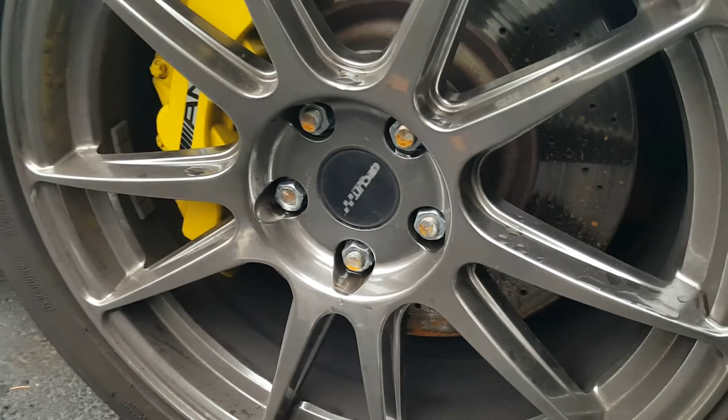Alright, so part 5 of the video series, and I've made a few changes to the car since the previous part. I've added spacers to the front because the tires were touching the suspension on the last track day. I've also had to do a stud conversion because of that.

I've also made some changes to the pushrod suspension. Last time the suspension was a little too stiff and it had already taken the car's balance from understeer to oversteer, so I needed to soften the rears to make the balance perfectly neutral.

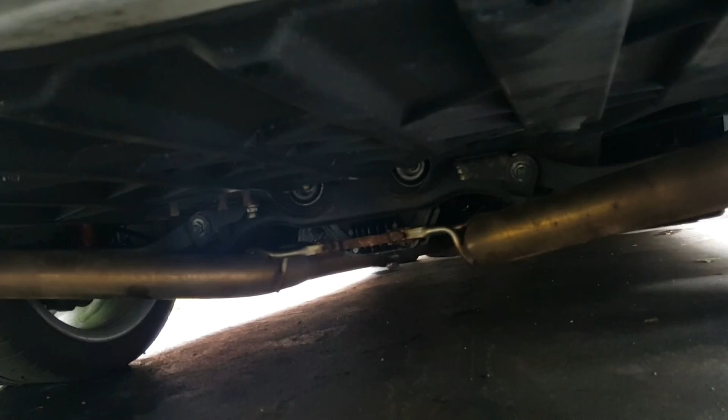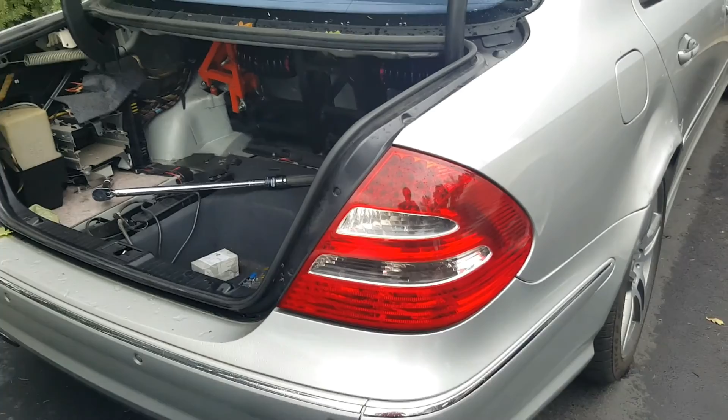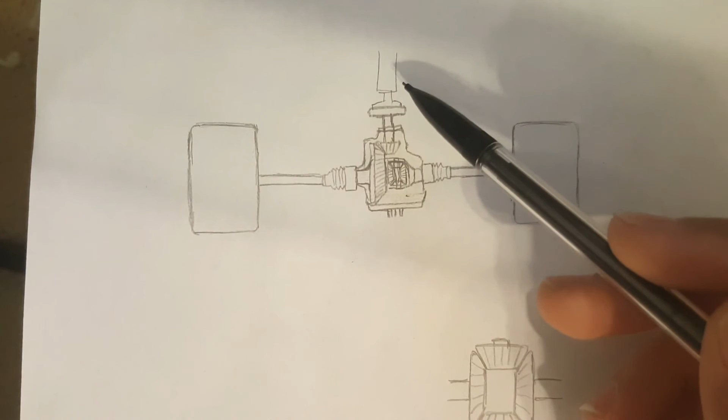The differential has these two gears in it, the pinion and the ring gear. The ring gear spins this way and it spins this cage along with it, which has a series of gears called spider gears in it. They're the ones that send torque to each individual axle, and that spins your rear tires.

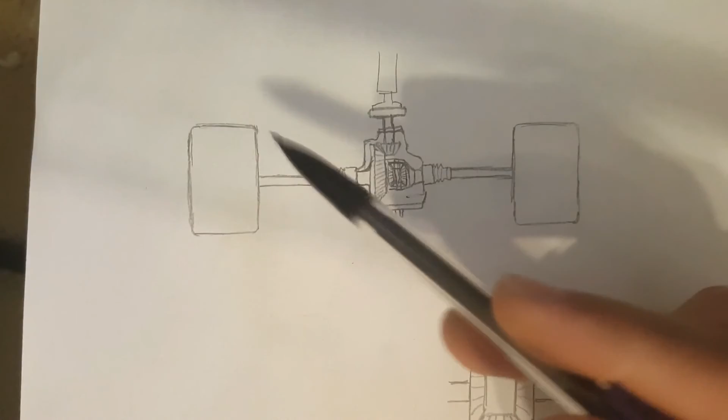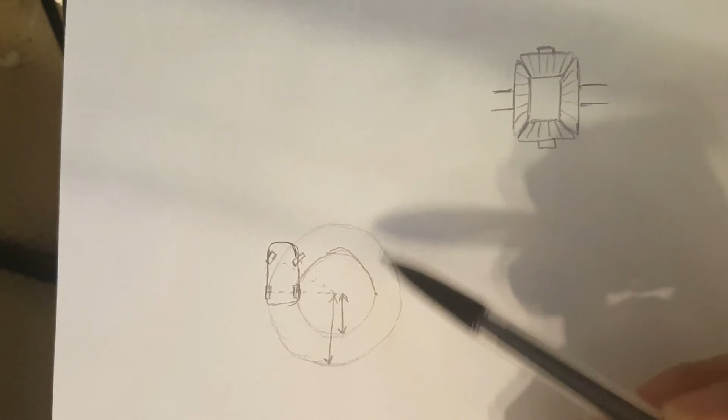The problem is the way the mechanism works. First of all, the reason they need this mechanism is because, let's say you're going around a turn and turning your car - the path your tires follow, at least when you're not sliding, is pretty much these two circles. Your inside tire follows a much smaller circle than your outside tire, which is why this tire has to spin slower than the outside tire. The differential is the thing that allows it to do that.

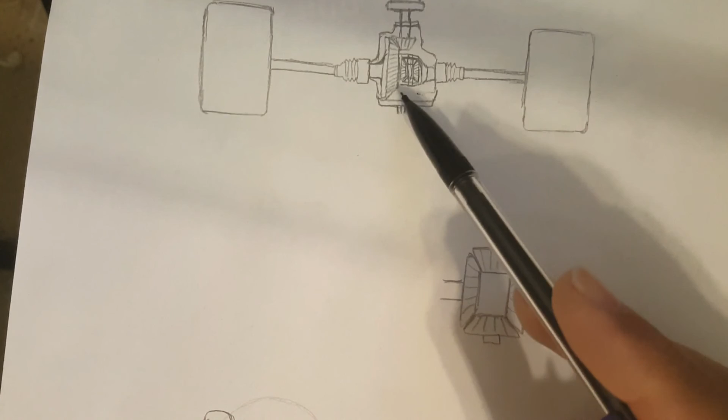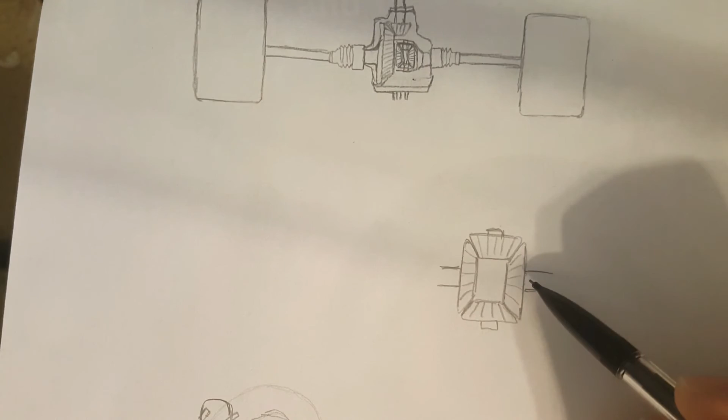These gears in the differential - this is just a bigger sketch of these spider gears. These two gears are connected with the cage, and the cage spins together with your ring gear in your differential, and these two gears go to each individual axle. The thing this mechanism allows is that these two gears can spin at different speeds while still getting torque from the engine. But the problem is that the torque split because of this mechanism is always equal. Whatever the torque is going to this wheel, the torque going to this wheel is exactly the same. It has to be, because of the way they're linked with this mechanism.

So let's say you're driving along and you push on the gas a little bit, and the torque going to this wheel is, let's say, 1,000 Newton meter. The torque going to this wheel will be exactly the same - it has to be 1,000 Newton meter.

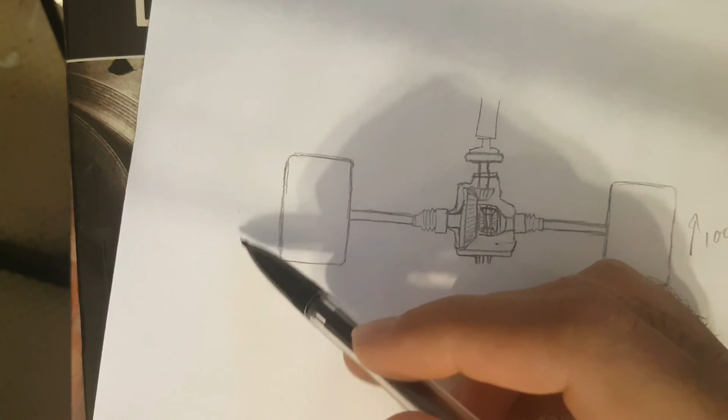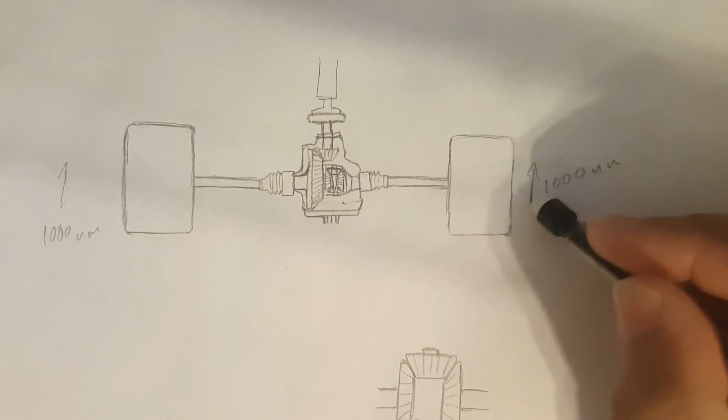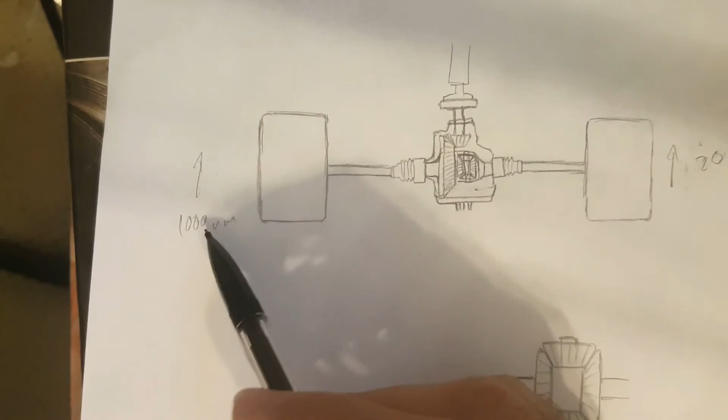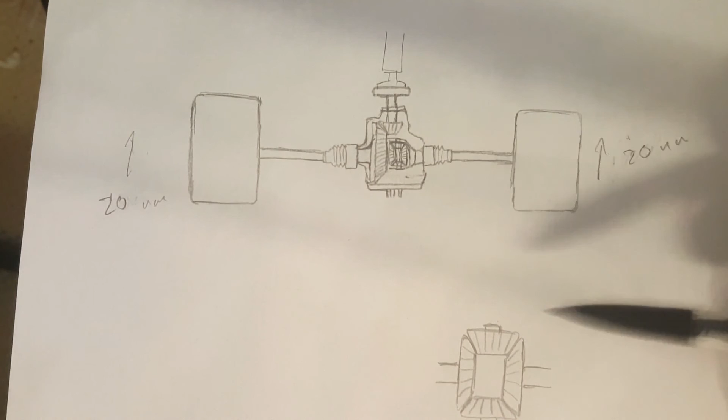Now the problem is, let's say this wheel goes over a patch of snow or something and loses traction. What happens is that 1,000 Newton meter can't go to that wheel anymore because it doesn't have the traction to put that torque down, so the torque will significantly reduce - let's say it goes down to maybe 20 Newton meter. The problem with this mechanism now is that the torque going to each individual wheel has to be equal, so the torque going to this wheel will also go down to 20 Newton meter, even if this wheel is completely on a dry patch with good traction. It will still be 20, just because of the way it's linked. And if you go on the power more, all that extra rotational energy would just go into spinning the tire that has the lesser traction.

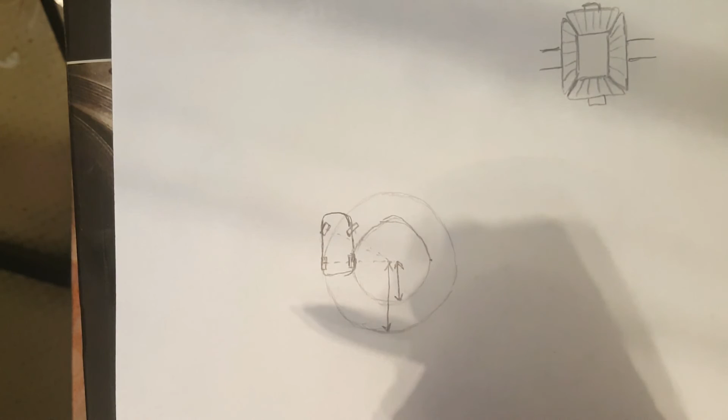So on the track, that's a big problem, because when you take corners, your outside tire is where all your weight gets shifted to, and your inside tire gets lifted. If you have a stiffer suspension at the back, that gets even worse, because then more of your weight is transferring to your outside tire, and your inside tire gets lifted even more.

The problem in my car was after I moved to the pushrod suspension, my rear inside tire was almost getting lifted completely off the ground taking sharp corners. And I knew that because when I would go on the power, there was almost no power.

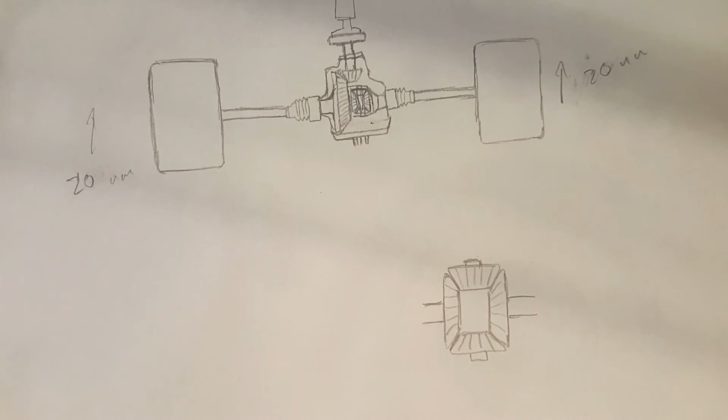I was losing drive completely, and all the power was just being wasted spinning the inside tire. So I needed to have an LSD or a welded diff or something to basically lock the diff together. What a clutch type LSD does is it has a series of clutches between these two gears, and it basically tries to resist the two tires rotating at different speeds. The more you go on the power, the more these clutches lock together, and they resist the tire spinning at different speeds, which will send torque from the tire that doesn't have traction, to the tire that does have traction, and help your car move faster.

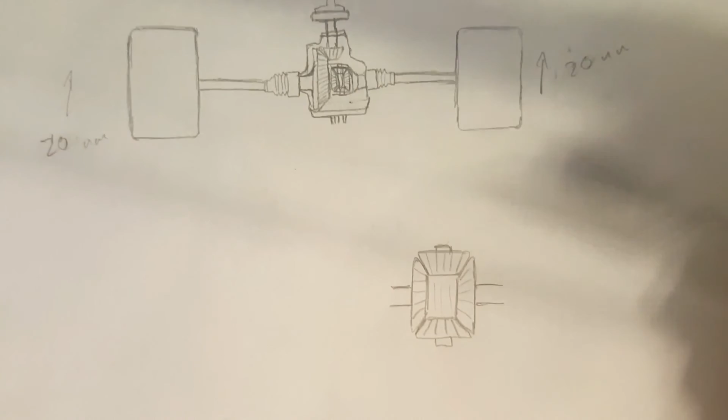Actually, no, the clutches aren't in here. The clutches are actually on the outside. They just connect the gear to the cage. But yeah, they do the same thing as connecting these two gears together.

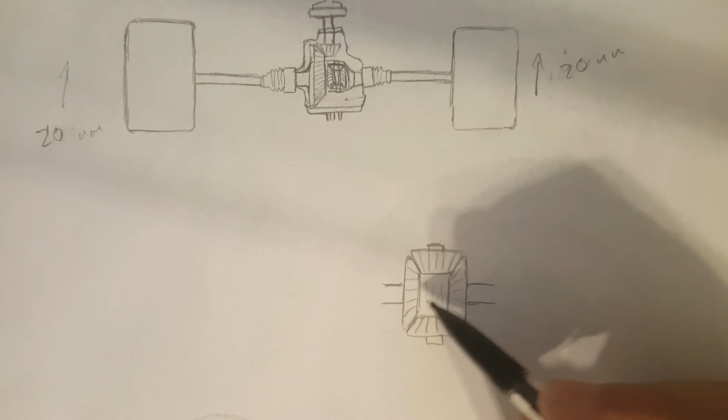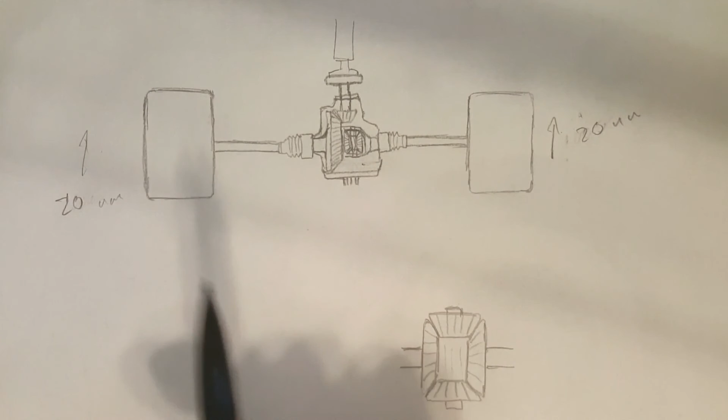A clutch type diff would have worked really well for me, but the problem was that they don't make clutch type diffs for my car. The only option I had was a helical differential, a Torsen diff. What a Torsen diff does is it has a different mechanism. The gears in that don't look like this, they're worm gears, and the way it works is it works better than this, but the torque split isn't exactly the same - it has some other ratio of splitting torque.

But the problem is that when one tire does get lifted and the torque of one tire goes down to zero, the torque going to the other tire is still zero, and you still lose drive. So the differential will work if you have a softer rear suspension and both your tires are touching the ground, but in my case it probably wouldn't have worked.

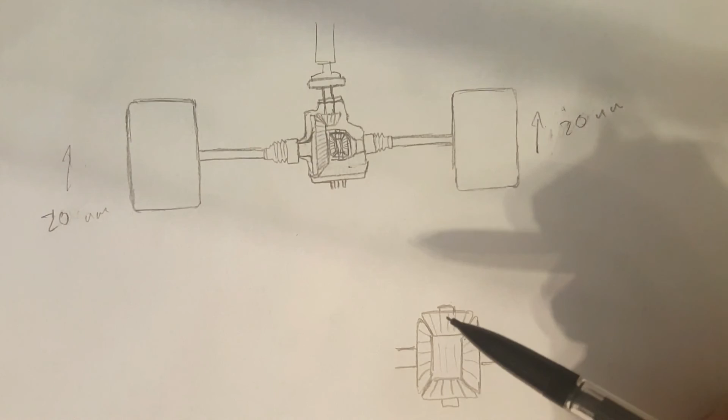So that's why I'm welding my diff for now. What welding does is it links both the tires together. So you know for sure it's going to work because both your tires are now spinning at the same speed. Even if one tire gets lifted completely off the ground, there is still power flowing to this tire because it's physically linked. There is no differential - it's just all connected together.

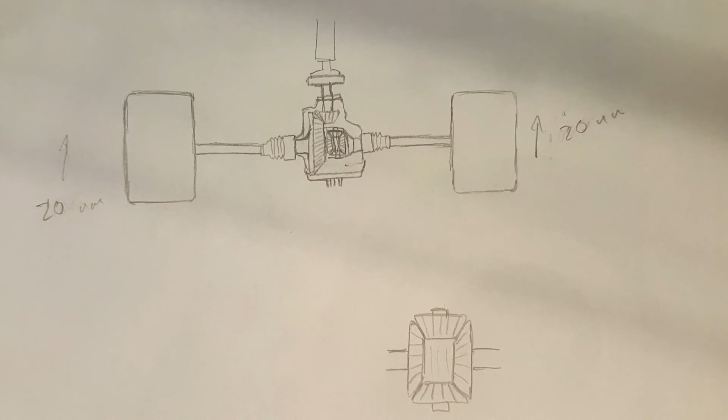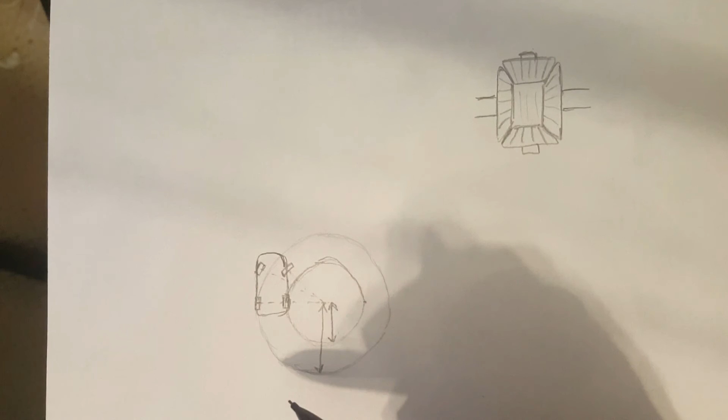The problem with the welded diff obviously is that when you take turns, especially really sharp turns, your tires are constantly going to be scrubbing the ground, and it's pretty bad. It just ruins the drivability of the car. If you've ever driven one of those SUVs with locking differentials and tried to lock them and drive around, it's pretty bad. So that's the problem with it.

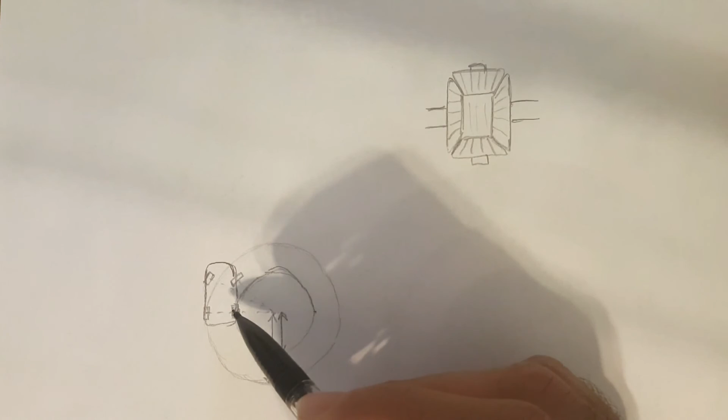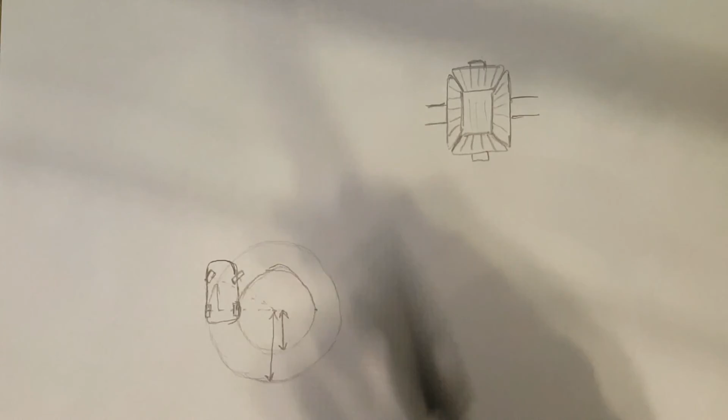The other problem on the track is that when you're taking a turn and your tires want to spin at different speeds, your rear tires, if you force them both to spin at the same speed, will basically try to push the car straight on and resist the car from rotating because they're spinning at the same speed. They want to go in a straight line. So in most cars, that will add understeer.

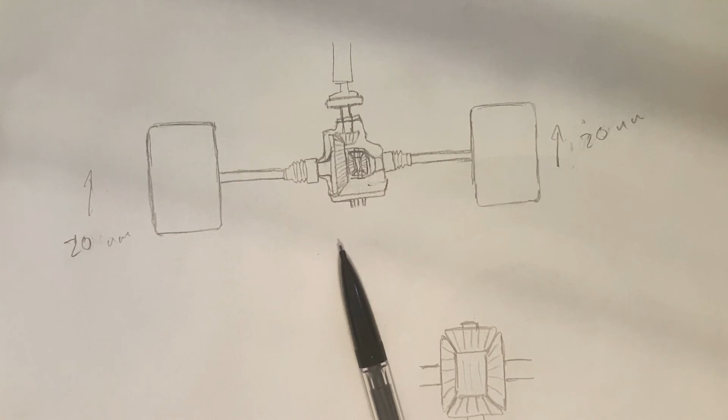For my case, I'm guessing it's not going to be too significant since in sharp turns my rear inside tire lifts off the ground anyways, so it's more like a three-wheeler. Both wheels spinning probably won't add too much understeer, so I'm pretty confident in my case it's going to work well. It might not work for all cars, because in most cars it will add a lot of understeer, so you might lose track time because of that. So I'm going with the welded diff for now, but after September I'm probably going to swap to the LSD and see how that one goes.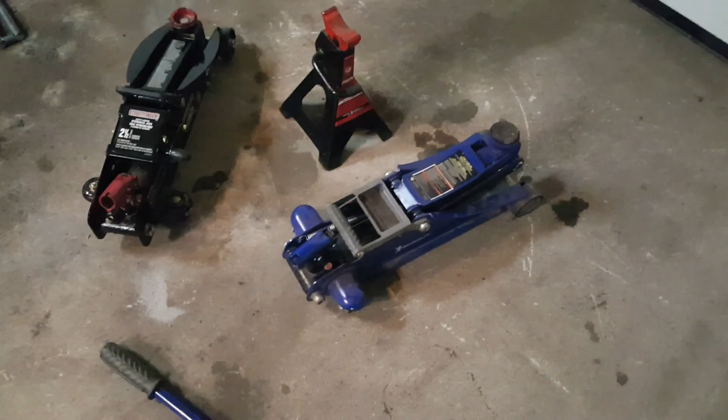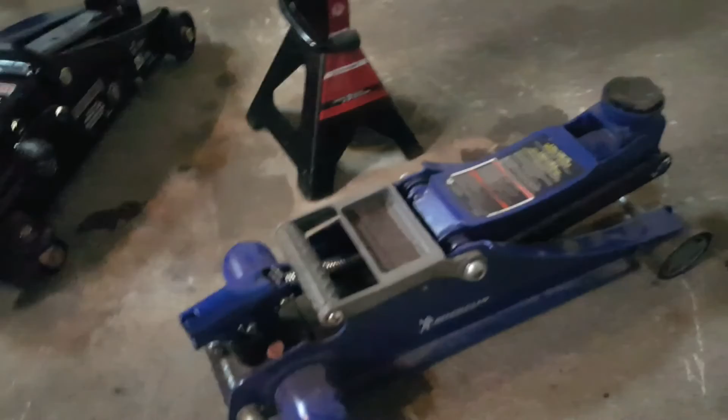Now before I show you how to remove the differential on your car, I just want to give a word of warning. Working underneath your car is really dangerous, and whenever you plan on doing that, make sure to use plenty of axle stands and make the car rest on the axle stands, not just on the hydraulic jack. Because these hydraulic jacks are pretty dangerous - it's just a hydraulic holding the weight of the car up, and hydraulics just have these rubber rings in them that hold the pressure.

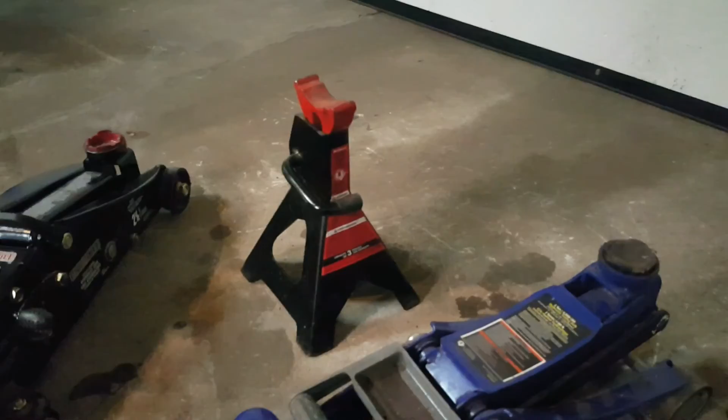If the rubber cracks, the hydraulic jack is coming straight down, so it's really dangerous. Don't rely on that alone. Always use axle stands. If you have one of these safer jacks with a locking mechanism, these are better to use. So what I usually do is lift the car up using the two hydraulic jacks and put the axle stands under it.

What I also do is slide a tire under the car, just because if the jacks fail and the car slides off the axle stands, there's something holding the car up and it doesn't come down completely. This is pretty dangerous, so if you're not comfortable doing this, I don't recommend it. People have died working under their cars, so it's a pretty dangerous thing.

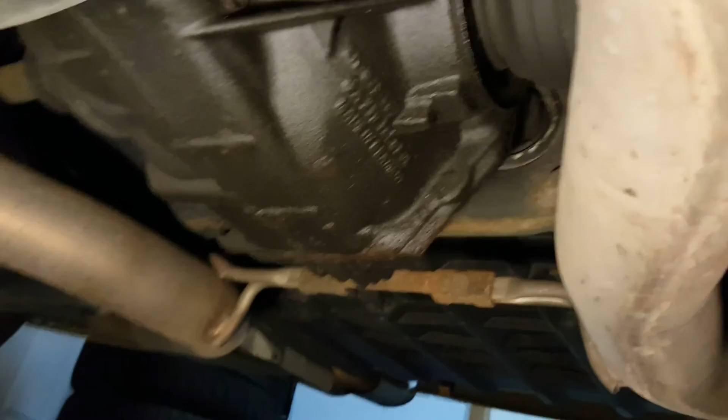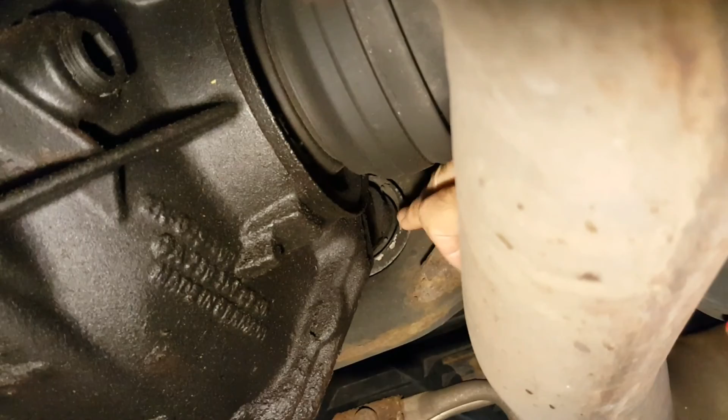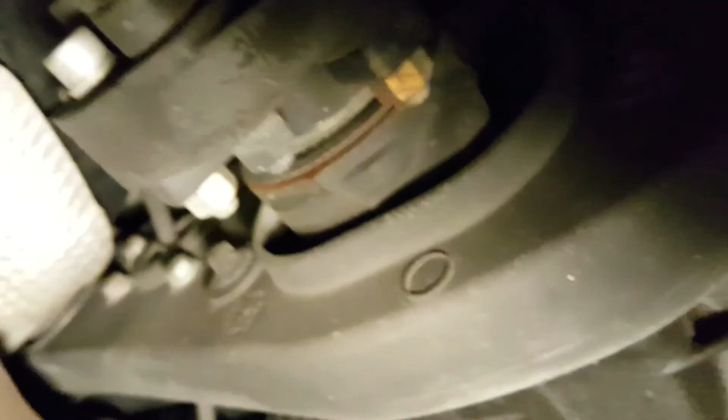Now I'm underneath the car having a look at the differential and what tools I'll need to get it out. It seems I have to remove a fair bit of stuff. It's a pretty big differential, and there are two bolts at the back, mounted to the subframe, and a bracket at the front with 4 bolts, two of them on the other side. I'm guessing I'll have to remove those bolts first, then remove the bracket probably, because the differential goes through the bracket and connects at the flex joint. Then I'll also have to remove the axles.

Before that, I'll also have to drain the differential fluid. This plug is actually the fill plug, where you fill the fluid in from. The drain plug is on the other side. You know which one's the drain plug because it's at the lowest point of the differential, and the fill plug is a little higher than the drain plug.

After that, I'm guessing I might have to remove the exhaust as well, because this is one side of the exhaust and that's the other side. The differential sits right in between those, so I'm not sure if there's enough space to take it out from between the exhausts. Yeah, it seems like a pretty difficult job, not the ideal thing to be doing at home.

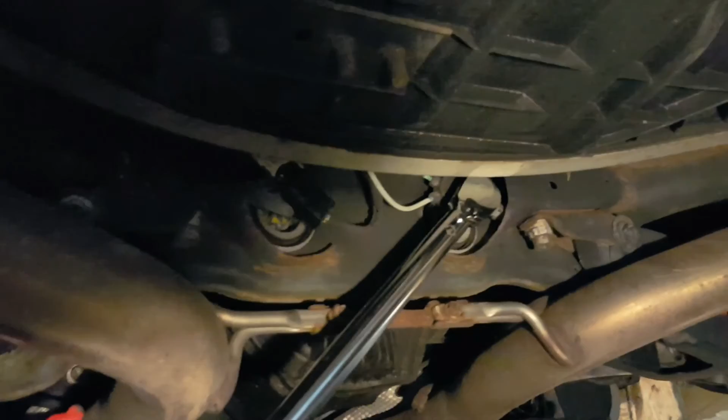Before I could undo the two bolts at the back of the differential, I had to lower my entire subframe a little bit. I did that by loosening these two subframe bolts, one on this side and one all the way on the other side, which drops the entire subframe down by about a centimeter. Now I can finally get my torque wrench on there. I'm not using a breaker bar because it still doesn't fit, but fortunately my torque wrench does fit now.

For removing one side of the exhaust, first I had to take out this rubber mount that attaches there. Then I had to disconnect the nut that connects the two exhausts together, and also disconnect that flange over there - that was really easy. For this other rubber mount, I didn't disconnect the mount itself, I disconnected the two bolts that go into it.

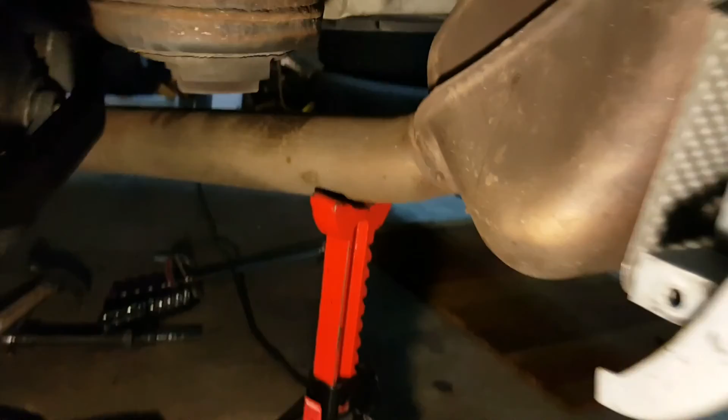Right now the exhaust is just hanging on with this axle stand. It's better to put an axle stand in place when you're unbolting all this, because it's a pretty heavy exhaust and you might not be able to lift it - when you undo the last thing holding it, the whole thing is going to fall down. So it's better to place an axle stand or something just to hold it in place.

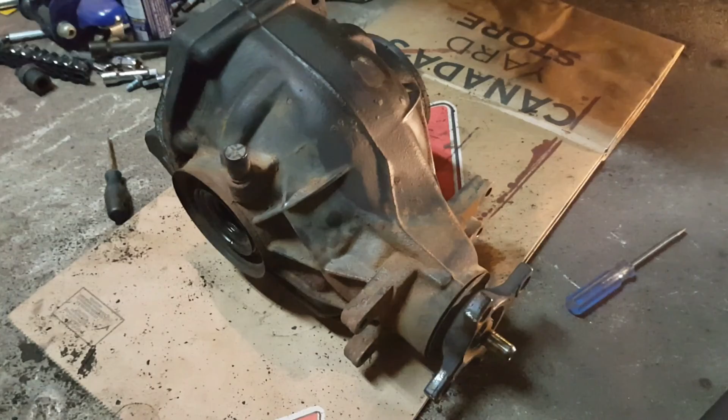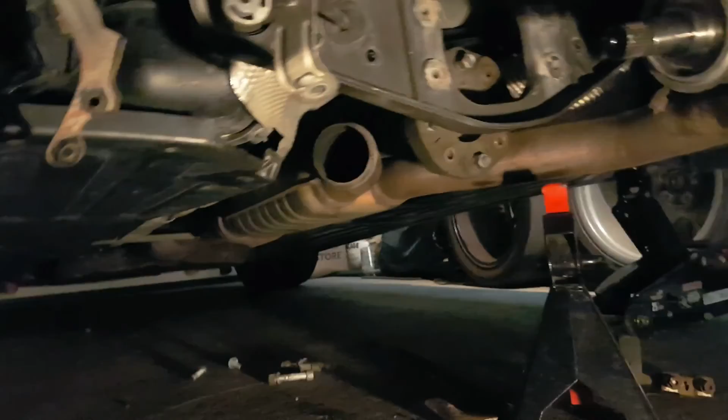So I finally have the differential out, but I didn't record the whole process since it was a difficult job. I'll just go over everything I had to remove. I removed one side of the exhaust - it would have been better to take out the entire exhaust, which would have made the job easier, but the bolts on the flange ahead of the resonator were a little rusty, and I didn't want to risk breaking them.

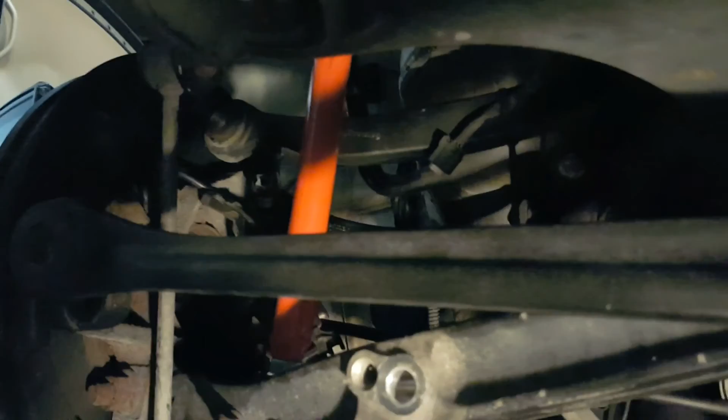Other than that, most of this side of the suspension had to come off. You can see this is off, this lower control arm is off from here, and most of the other control arms are off too. The only control arm left in place is this one. I had to do that so I could move this wheel hub far enough to pull out the axle.

The bracket that the differential mounts on, I loosened the bolt on one side, but I took this one out entirely so I could pivot the whole thing down to take that off. This axle I just left in place, and also everything for that side of the suspension, just so I don't have to do too much work putting everything back together. Once one axle and one side is out, you can slide the differential this way to take it out of the axle.

The differential is a little heavy, so if you have two people, it's easier to take it off. For one person, it's a little too heavy to lift.

Another thing, the flex joint over here has these metal inserts that go into the part of the differential where it mounts. The way to take these out, the best way I found was to use a chisel that doesn't have an edge too sharp to damage the rubber, put it right at this edge, and hammer it so the pin breaks free of the differential, and then you can remove the flex joint and take it off.

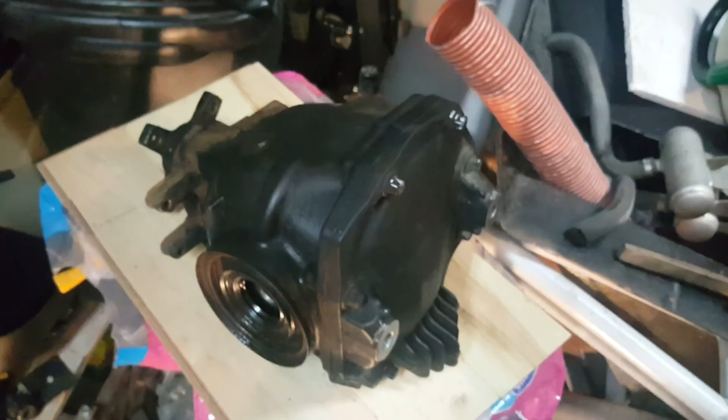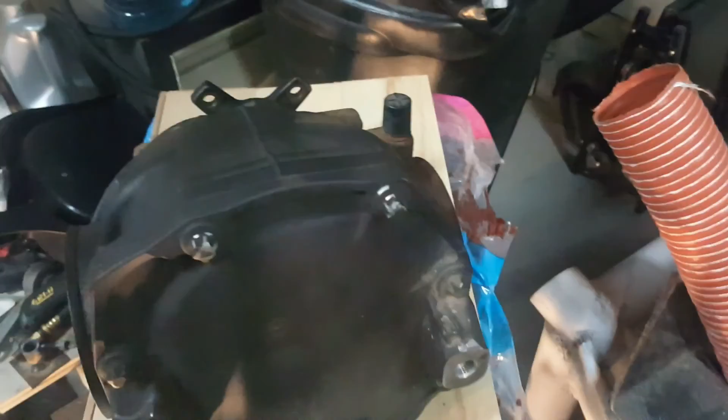Okay, now that I have the differential out, I can start disassembling it. The first thing I'm going to do is remove this back cover. It's held in place by these 8 bolts.

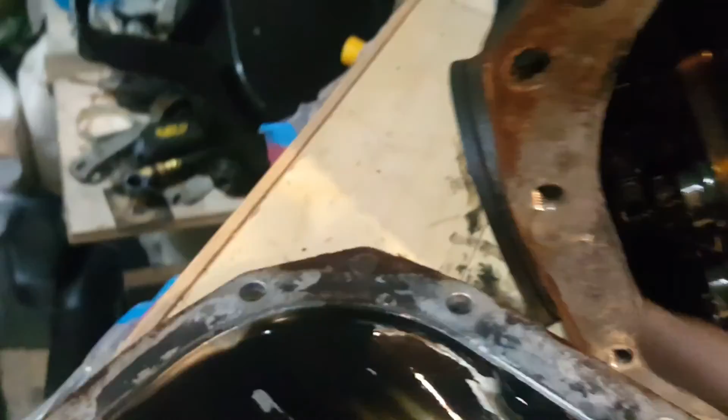Alright, so now I took the back cover off the differential. Here's these 2 holes they've left in the differential. I inserted a pin in one and hammered it from the back, after removing the 8 bolts, so it would push the plate off and remove the silicone. There's actually 2 of these holes, one is over here, but I just hammered one and it came off, so I didn't have to use the other one.

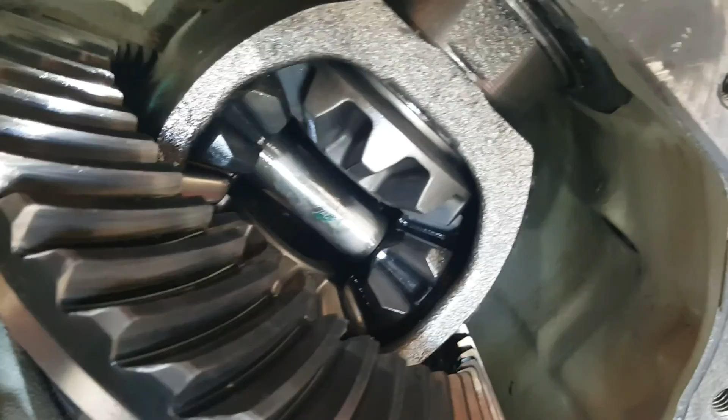Okay, so now I cleaned most of the gear oil out using alcohol, and the reason is because when I'm going to be welding this, it's going to heat up, and the oil creates a lot of smoke, which isn't good when you're welding something.

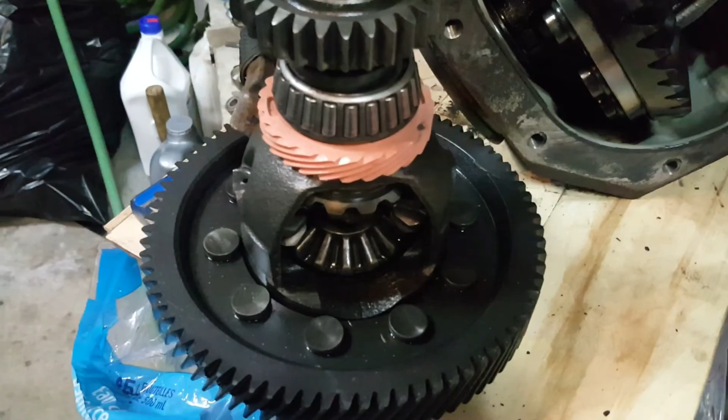Now before I start welding my actual differential, I'll practice on this scrap differential that I have. It's from a Mazda, so I don't really care about it. That's because if I screw up on my actual differential, that's the only one I have and I'll have to end up replacing it. So it's best to practice first to make sure you'll get the weld right.

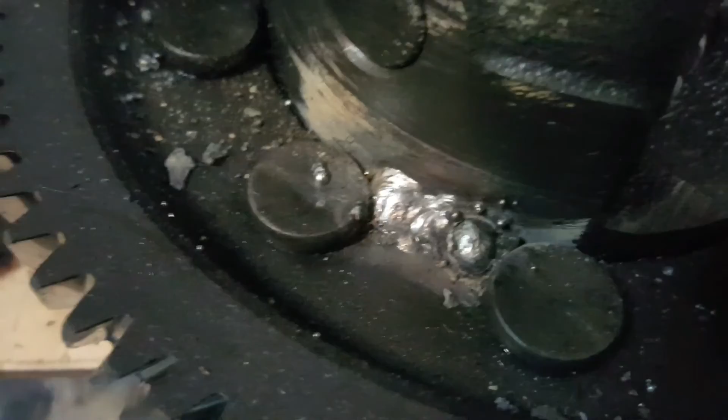Alright, now I applied 1 layer of weld on it, just a little bit. I'm not welding it on the actual gears, I'm just welding it on the side. This is just to see how the weld sticks to these metals. But yeah, that's just 1 layer.

I'm guessing I'll have to apply 2 or 3 layers to make it thick enough, because all of this metal is pretty thick and there's a lot of force going through it. Just look at how thick the cage is over here, so my weld has to be something like that. It has to be really thick, several layers of welding, I think 2 or 3, to make it strong enough to hold.

Just to tell you what parts I have to weld, I have to weld all this section over here to hold this gear to the cage. I'll have to weld a little in between these gears, and I'll also weld these gears to the cage. I'm not sure if I'll be able to reach that gear over there, so I'm just going to leave that one and make these welds strong enough so that even if I leave that one out, it will still hold.

I have to be really careful not to splatter any of my welding on the splines in there where the axle sits, because if I get a whole bunch of welding on that, my axle won't be able to slide in and it'll cause problems.

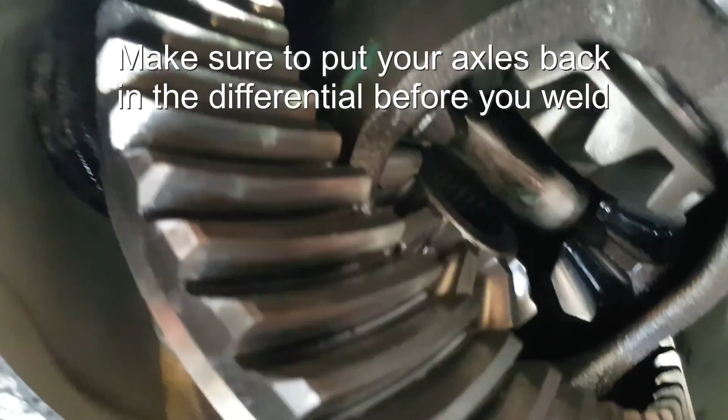Like you can see over here, there's a lot of junk that flies around when you're welding. I'll have to clean all of that off. I'll try to put it at an angle so most of the welding splatter falls out of the differential. But all of it that goes in, I'll have to clean it off because there's oil inside this that's circulating.

So you can't have any welding splatter on it that will circulate around the differential and break something. Okay, so I just did the first weld. It's sinking into the metal pretty nicely, but it's a pretty thin weld right now. I just cleaned it up with a wire brush, and I'll probably need to do this one or two more times to make it thick enough.

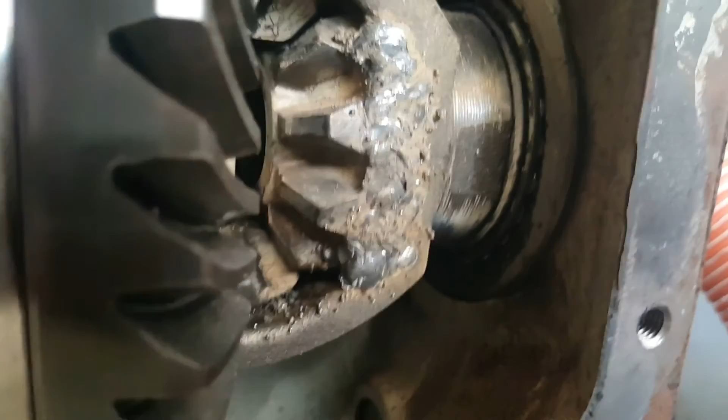So this is what the weld looks like after applying two layers of welding, and it's already getting a little bulky and looking a little ugly. I don't think I'll be able to get a third layer on here because my MIG welder isn't going to be strong enough, since the thicker the weld gets, the more heat you need to apply the next layer. But I think this is good enough. I'll just do all the other welds now and make them the same.

And also then rotate this thing around and do the other side.

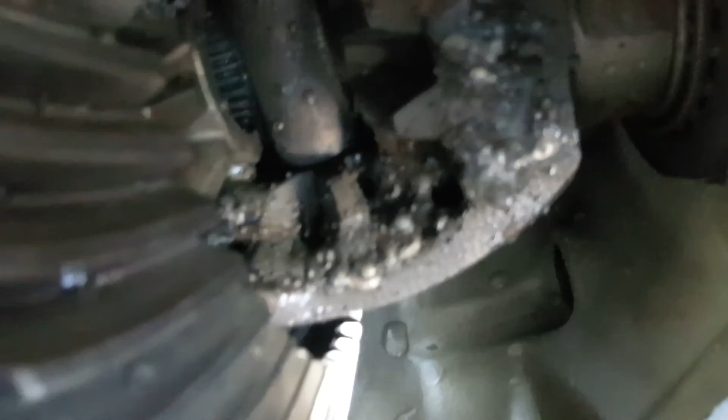Okay, now I've cleaned the entire differential. I tried cleaning it with alcohol, but there were so many splatters inside that I finally had to clean it with water. The problem with cleaning it with water is that it will rust the gears, but I'm going to dry it as soon as possible so it doesn't get too rusty.

After that, I'm going to prime it with some differential fluid, the needle bearings in there, and this ring gear, and also try to get some fluid back in the bearing that connects to the propeller shaft. Then I'll apply some silicone around the edge and close the differential, mount everything back in the car, and fill it with fluid again.

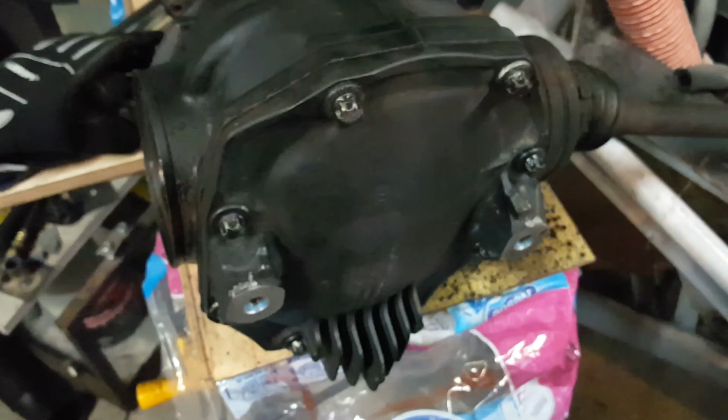Alright, now the diff is closed again. I've already applied the gasket maker and torqued all the nuts.

Now I have to pick this up and put it back in the car. I called a friend over to help me do that because the diff is too heavy, I can't lift it myself. I'm going to use a jack anyways to lift it up, but still, it's a little too heavy for one person to do, so it's better to have another person.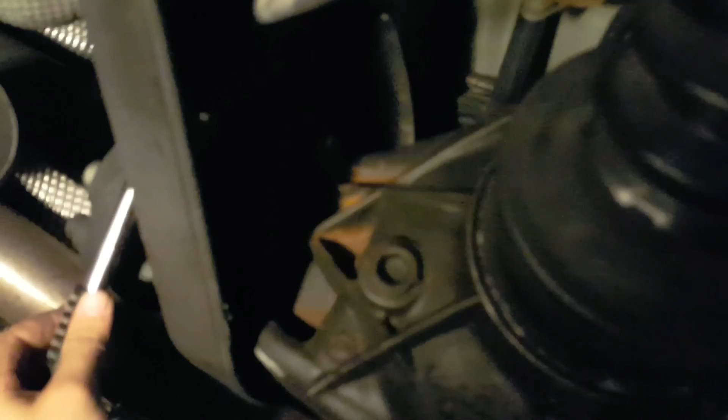Alright, so now I'm putting the differential back in. I have to say, as hard as this differential was to get out, putting it back in was even harder. Now I'm just bolting everything back in.

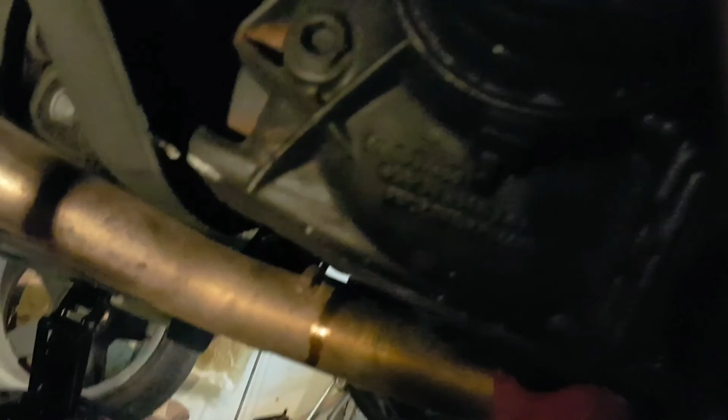I've bolted the suspension for this side in, and now I'm going to raise this bracket back up so it goes in this hole over here, and then I'll put that bolt in. But yeah, all in all, a really difficult job.

And once all of this is done, I'm going to remove the bolt for the filler plug over here and fill in some differential fluid.

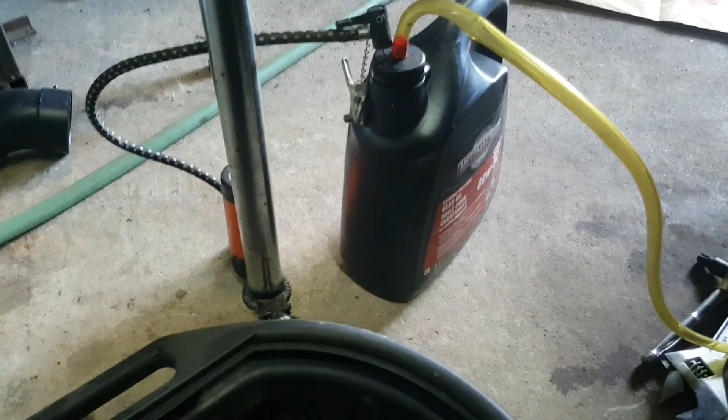So here's the trick I use for filling the differential fluid. I made a hole in the top of my gear oil container and inserted this rubber tube, making it tight so it doesn't leak any air. Then I made another small hole where I inserted this pin, which is what they use for filling basketballs.

And I have a bicycle pump over here, so when I pump air, you'll see the oil start coming out there.

The other end of the tube right now is over here, but I'll insert that in my differential, and that's going to keep filling fluid.

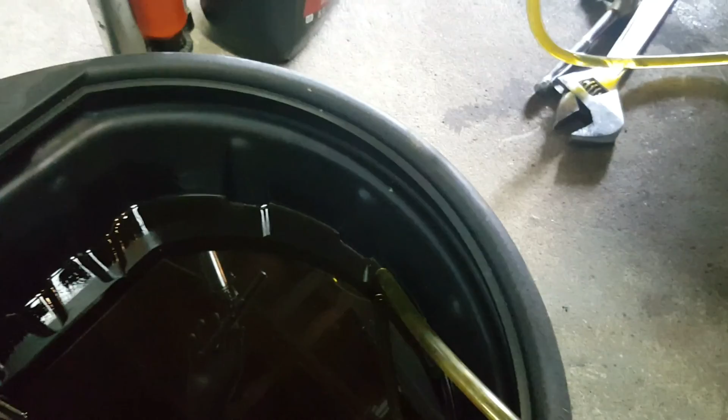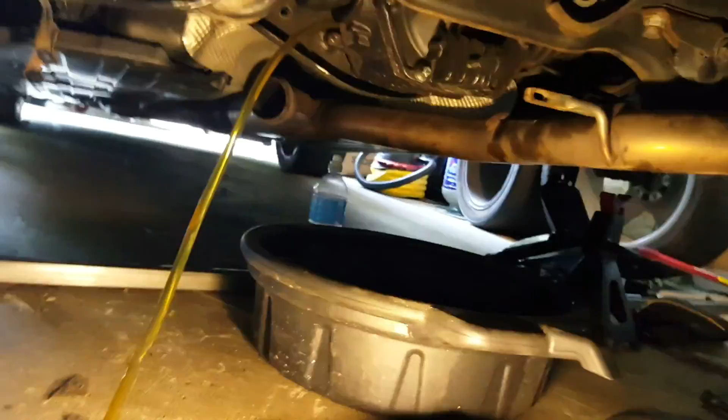Right now I'm just going to let some fluid run through, so if there's any dirt in the pipe, you can get rid of that. Now I've inserted the tube in my differential, and it's slowly going to keep filling fluid. When I see fluid dripping down from the differential, I'll know that it's full. Then I'll release the air pressure and put the fill plug back in.

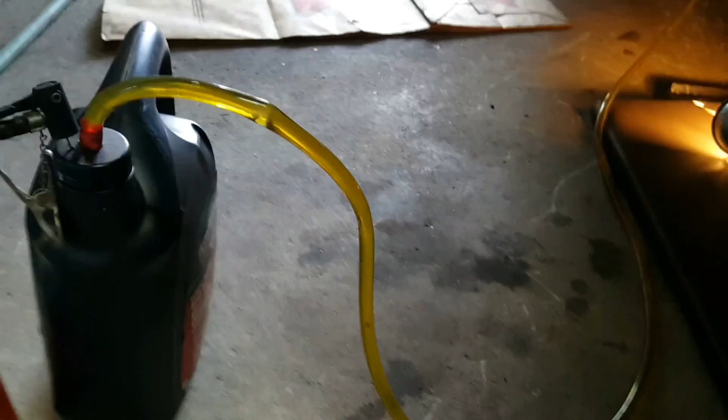I'll just have to sit here and wait, and usually it takes a few minutes for it to fill up, and then I'll be done with this.

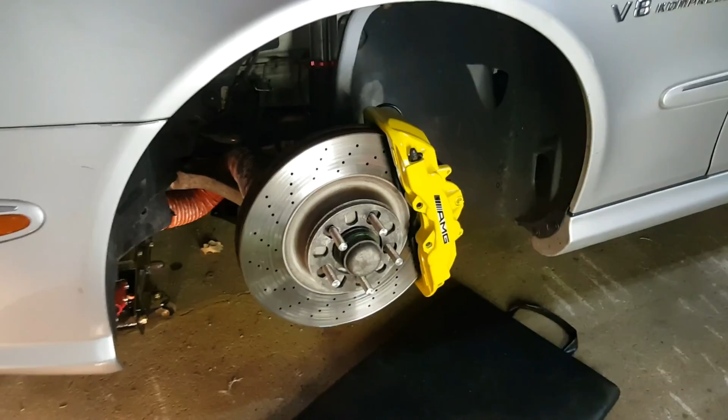One final change I've made to the front of the car is that I've added these studs and the spacer. The reason I went from using wobble bolts to studs is because wobble bolts only come in one size, and that size wasn't working for me after I added these spacers, because what spacers do is they move your wheel away from the hub, and if your bolt isn't long enough, you can't use that bolt anymore.

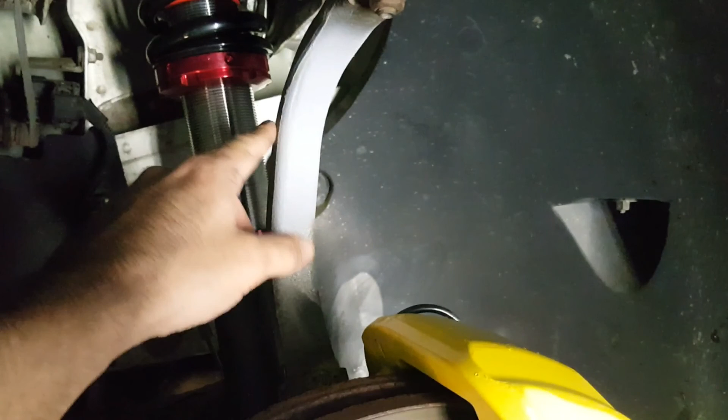I had to add spacers because on the last track day my tire was touching this part of the suspension. I've already primered it now, so that if the tire touches it again, there will be a mark there and I'll know that it was touching.

But the problem was that you can find wobble bolts, but you can't find wobble nuts, and with studs you need nuts. So what I've done is...

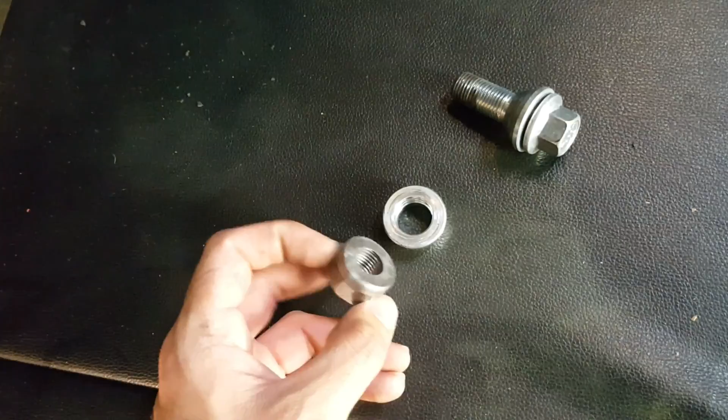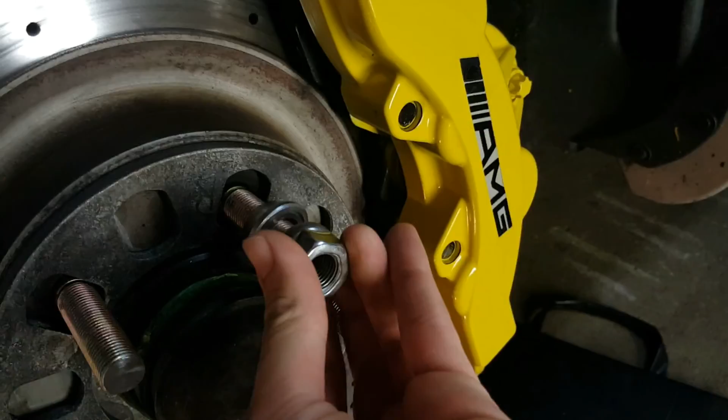I took these normal lug nuts that were cone shaped at first when I bought them, but I cut that cone section off, and I took this washer off of one of the wobble bolts. When I put this washer on here, it will basically work like a wobble nut rather than a wobble bolt. So it's pretty much like I'm going to put this lug nut on like this, and now this washer can move around, and it's pretty much the same thing as a wobble bolt, but a lug nut.

So hopefully this should work fine and my tire won't be touching the suspension anymore.

One final change I made to the pushrod suspension was that I moved the springs down to soften the rear suspension, but I'm not going to talk about it too much in this video because it's getting long enough anyways. I'll make another separate video on suspension setup later on.

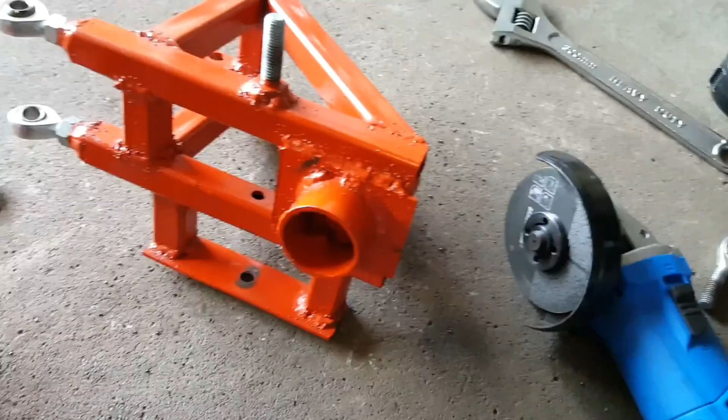Okay, so I have my rockers out, and I'm just cutting this weld off with an angle grinder, and I'm going to move this whole thing down, which means that the coil spring is going to mount lower down, just like I've done it on this side.

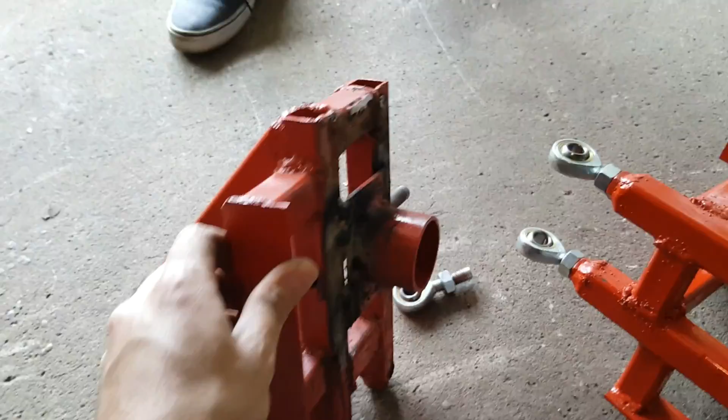This will change my spring rate from the equivalent of 27k, which it is right now, and it will go down to about 19 or 20k, which hopefully is going to be good enough for correcting the balance of the car.

So after doing all these changes, I did drive the car for a bit on the streets. You might be wondering, how does it feel like driving on the welded diff? To be honest, I couldn't push it to the full limit because when I was putting my axles back in after welding the differential, I messed up on one of the parts and I broke my reluctor ring.

That's the ring that goes on the axle, and it gives a magnetic signal to the wheel speed sensor so your car can sense how fast the wheel is spinning. I think I broke one of those while putting the axle back in, and now the problem is when I push the car too much, it kicks into limp mode every time.

But I've still driven the car on the streets, and I felt what the balance is like and how it accelerates. The welded diff has made a big difference. Now, for the first time, I can actually put the power down while cornering in this car.

The welded diff is a bit of a hassle when driving slowly. When you're taking corners, especially in a parking lot, it scrubs the rear tires an awful lot. I switched my rear tires onto my winter tires because they have less traction. With the slicks, it was just scrubbing an awful lot, and it was painful driving it. With the winters, it's better, so I guess I'll keep the winters for driving the car to the track.